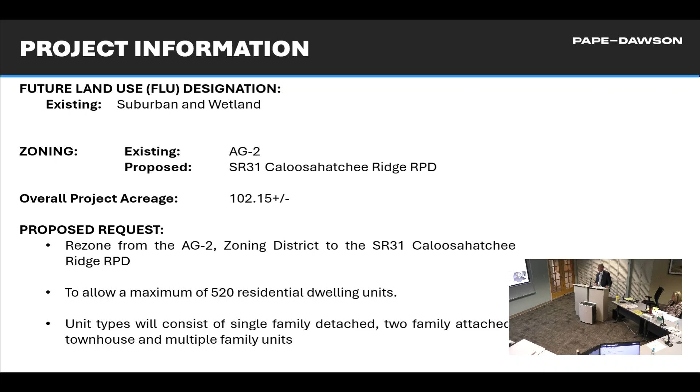This was our density calculation sheet where we came up with 520.94 units as our maximum.

After ERP staff did its calculation, which you probably saw in the staff report, they concluded that we could actually have requested up to 536 units to be consistent with Lee Plan Policy 1.1.5 and 1.5.1, which is a calculation that talks about the suburban land use category allowing a 6 unit per acre density.

We also have wetlands that we're transferring density from under that policy at 6 units per acre to parts of the property that will be developed. So we're taking 0 units for the 11.26, or 11.4, acres of impact to wetlands on the site.

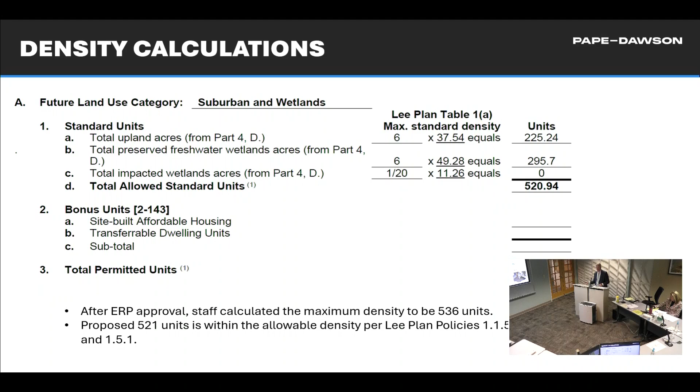So the site, as we said, we included the ERP in the 48-hour letter, and I'll go over a couple of those changes at the end, just to make it flow a little better.

This is your existing future land use map. Green is what's considered wetlands under your GIS system. The suburban is the gold crosshatch, and we did a prior land use administrative map amendment that staff acknowledged.

They had this portion of the site here, adjacent to FP&L property, designated as industrial, and staff determined that was just a clear mapping error, so it became suburban since it was not a wetland.

All right, so on the map, though, it's all shown as suburban. It's not shown as wetlands, I don't think, is it? The green is what's considered wetlands under your future land use map.

We're in for a map revision that I believe was completed today by staff, and that map is going to look more like this. I don't know if that's the exact one.

I had this from our dealings with... okay, Mr. Burr, this represents the revised map. It does, and I think your staff may have a corrected version that's the official one. Okay, yeah, I have that for the record.

It doesn't really affect the density calculation. It really just cleans things up.

As you can see, this finger of green that was going out to the river, this is all a big ridge. I should explain that the river was dredged in the past, and there's a spoil pile that was established all along this area. So this area is actually higher along the river than other portions of the property because of those spoil banks that were created.

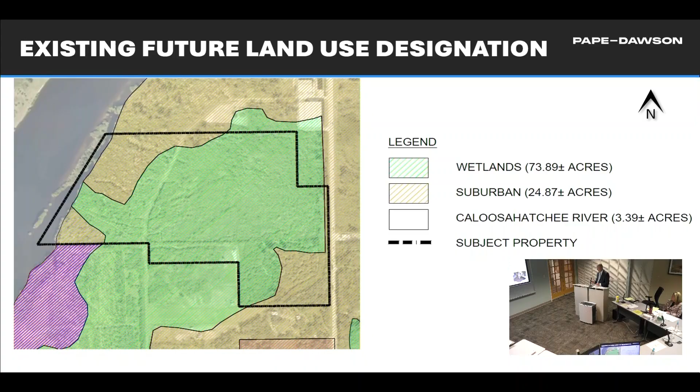This is our proposed master concept plan. We have a large area that we're not calling preserve on this plan, we're calling it open space wetland. That's all of this hatching area, and a little sliver.

One of the prominent features is this easement corridor that goes through the property and on down to Florida Power and Light. It's a 50-foot wide gas line easement that serves Florida Power and Light.

So they bring in, at the marina, a barge with fuel, and then it gets pumped under the property in a pipeline. We're allowed to cross the pipeline, but not allowed to build on it.

So along State Road 31 here, we have a primary access point shown at this location, which lines up with what used to be the little lounge across the street.

There's been some discussion, not by me but with others, with FDOT about that being a full intersection when they redo State Road 31, because Neal Communities has access in the same location.

We're showing a secondary access point, a right in, right out, in this lower portion. We believe this will probably become either a townhome project or apartments in this location. It's designated an R2 tract, and that's where we're proposing a 50-foot maximum height.

This primary road will extend all the way west across the Florida Power and Light easement area to a larger development tract with amenities that we're calling the R1 tract. That's where we've proposed the deviation to allow up to 75 feet in height.

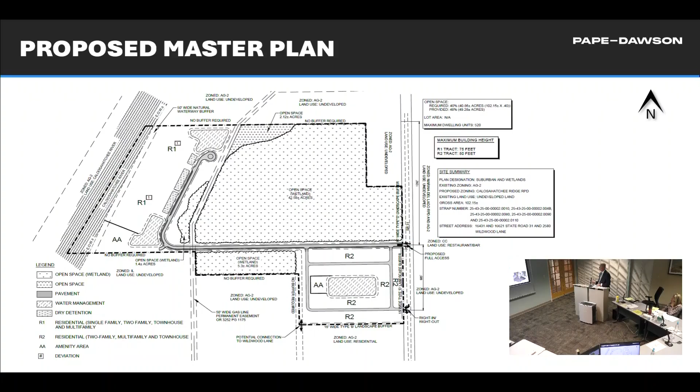Color versions are just a little easier to look at if you want to refer back to anything. We'll come back to this exhibit—you can see the two development tracts identified as R1 and R2, each with its own amenity areas, labeled AA, and of course the internal water body. A sliver of about 3 acres of the project actually extends into the Caloosahatchee River, but obviously no density was taken for that ownership.

Does this site plan take into account the improvements to 31? Or will the site be impacted by those improvements? The site may be impacted—we just don't know. There's been no notice of taking provided to our property owner. There's no drawings available yet?

I'll let Mr. Banks address that, but the exhibits we've seen have gone back and forth. For instance, they had a full interchange planned down at State Road 80, not at grade, and I've heard that's no longer on the table. They're going to make at-grade improvements now, so all of the right-of-way needs have changed.

We saw an exhibit—so it's going to be an at-grade improvement now? That's what we hear. I'll let Jim tell you a little more about that, or Scott. I'm just wondering about the road along the cross section, State Road 31. I don't know for sure. Like I said, they haven't provided an order of taking. They've apparently made contact—an appraiser has made contact with the county and our property owner—but I don't think there's a definitive area of taking yet.

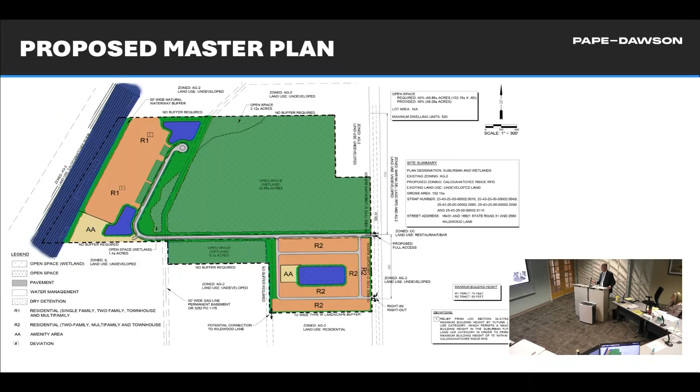Proposed uses, pretty standard here. As I mentioned, we're asking for accessory uses, the dwelling units I mentioned: single family, two family, duplex, townhouse. Excavation areas, entrance gates, potential fences, walls, recreation facilities, private, and fences, of course, and rental leasing offices in the event that we have an apartment complex.

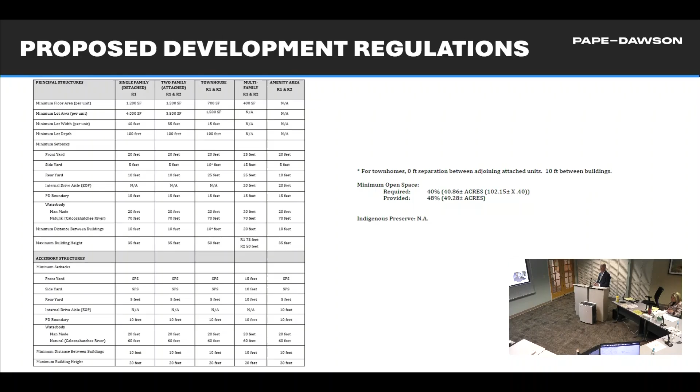Proposed development standards, hard to read. Probably the highlights are here. For the multifamily, we requested on the R1 tract, closer to the river, a 75-foot height. The R2 tract, a 50-foot height. And that's taken care of with the deviation that staff is supporting, and I'll go through that momentarily.

It shows you that it applies on the R1 tract, and we specified the one change I made that was in the 48-hour letter too—probably typographical, but it came out as tract K2 instead of R2 and R1, so clarifying those. Under the Lee plan, 45 feet is the standard height, and we're allowed to seek heights up to 75 feet if we can demonstrate that we've met the deviation criteria.

In this case, we've prepared a cross-section for staff. We had no access to the single family here, but we did have access to the condominium buildings down here at Bay Point. It's about 1,300 feet to where our closest building could be. We prepared a cross-section that showed that 1,300 feet plus our setback, the natural water body buffer, and some landscaping. We don't really reflect it, but all of that shoreline has a mangrove fringe on it.

And then you can see here, in front of our property, there's this linear mangrove island that provides some additional protection for views. But I think the shortest view, even from here to here, is about 1,000 feet. So we think that given the road improvements on State Road 31, where at least the last we heard, they're going to be fixed, it will be a fixed bridge.

It's probably going to be up to 75 feet in height for the bridge structure. And then they're going to elevate State Road 31 as a hurricane evacuation route. So we believe that once you make those State Road 31 improvements, the increased height—the 5 feet on the R2 tract—is probably indistinguishable from whether it's 45 feet or 50 feet.

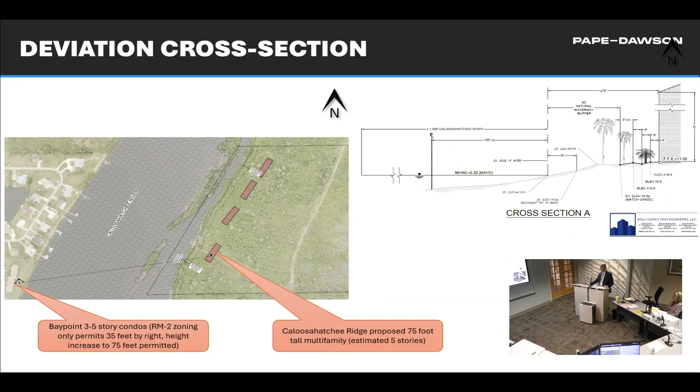We have the boat barn to the north that you're probably familiar with. Some of the FP&L structures to the southwest are also tall, and we had our surveyor stop by and measure the height of the Lee Civic Center—that building's about 77 feet tall. So in the vicinity, we're not out of character with that. We think it makes sense to allow these residences along the river to enjoy some river views.

Here's some imaging that we did showing potential building in the background. This is taken from the Bay Point condominiums to the south, where I showed the cross section.

Again, to show you what's going on in the surrounding area: here's Bay Point across the river, where we took those images. I think you're pretty familiar with everything going on. There's a series of commercial at the intersection. Neal Communities had 31 Oaks and the Oaks at Twin Lakes, the Caloosahatchee Palms, and just going on State Road 31, there's a significant amount of development occurring on that corridor. So this isn't an isolated rural area, and certainly won't be once a lot of the other state road improvements are completed.

Again, this is a little closer image to see all that's going on in the corridor, north and south of the river. Clearly an urbanizing area. There's water and sewer available to the site, so that clearly is going to support more of an urban designation rather than the ag zoning that it is today.

We did a pretty extensive Lee plan analysis; that's part of the narrative background. I've got a lot of these policies—I'm not going to mention all of them, but the principal one we already talked about was establishing the density for the property under the two policies.

One is your wetland policy that allows us to transfer density off of wetlands that are not being impacted, and the other is that the suburban upland areas could be up to 6 units per acre. So those two calculations together come up with 536 units. We're asking for 520 units, so we're within the Lee plan policy for density.

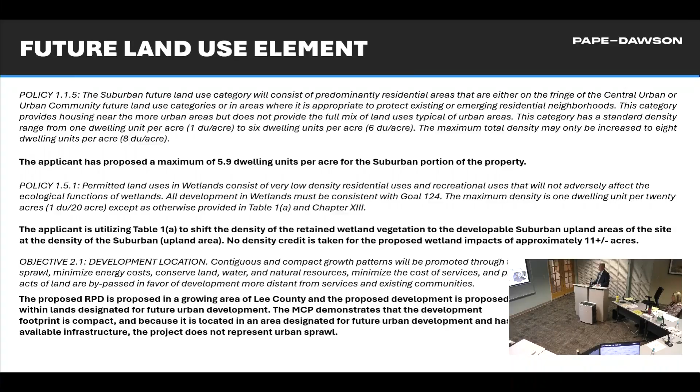As I mentioned, we have water and sewer to the site for residential development. A portion of the site is in the coastal high hazard area. But it's really odd because all the areas along the river, the spoil piles, are not in the coastal high hazard area.

The coastal high hazard area is largely in the middle where we have the wetlands that are going to be preserved. It's kind of a unique designation, but all of these get elevated out of the floodplain, so there's really not going to be an issue for residences. And with State Road 31 improvements planned, you have a road corridor that can carry people safely in the event of a hurricane evacuation.

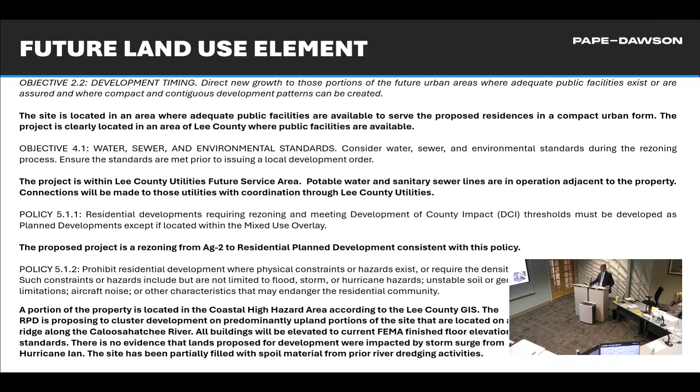The Caloosahatchee Shores Community Plan, which we're within, talks about maintaining the character and natural resources. As the slide showed with all that's going on in the corridor, this portion is not really a rural area, but given the high amount of open space we have on the site, conditioned by staff, and our adjacency to the river, we don't think there's an issue in terms of compliance with the plan, and staff concurs with that.

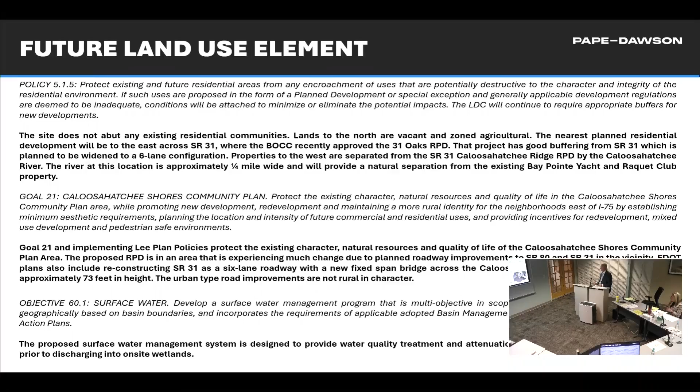For natural systems and the water management system, you'll hear both Marco Espinar and Mike Delate talk about how we've incorporated these natural features as part of our drainage system. This has been through an extensive review by the Water Management District for both the impacts to wetlands and the water management system, which you'll hear about later.

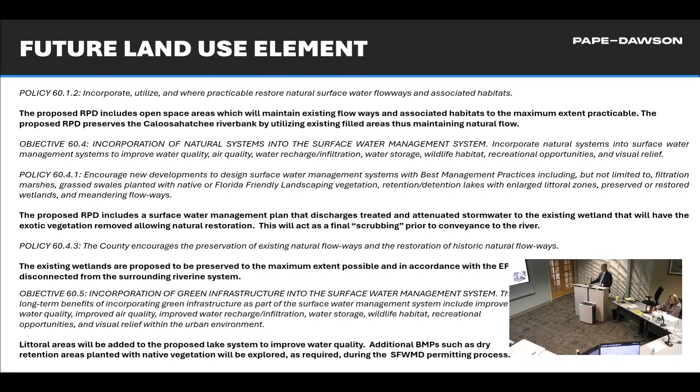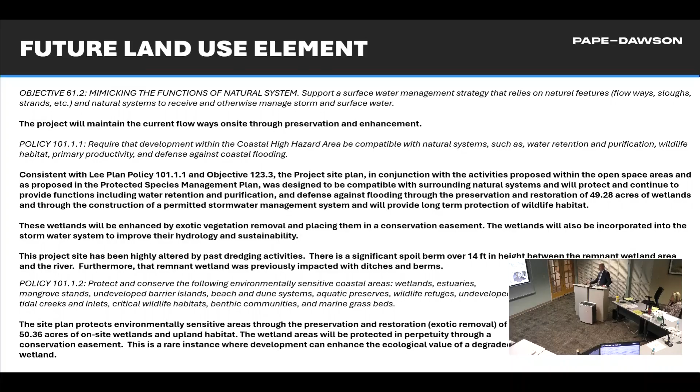For open space areas, as I mentioned, we exceed the minimum required, and staff has conditioned that we'll have at least 49.28 acres of the 102-acre site as open space. So we've exceeded your open space standard, and we'll have to reflect that on any development order plans that come forward.

Highlight here would be development sort of limited to a density of 1 unit per 20 acres in wetlands. As I said, we impact a little over 11 acres of wetlands, and we're not claiming any density consideration for that. And again, we're cleaning up and preserving the other, what are very poor quality wetlands today.

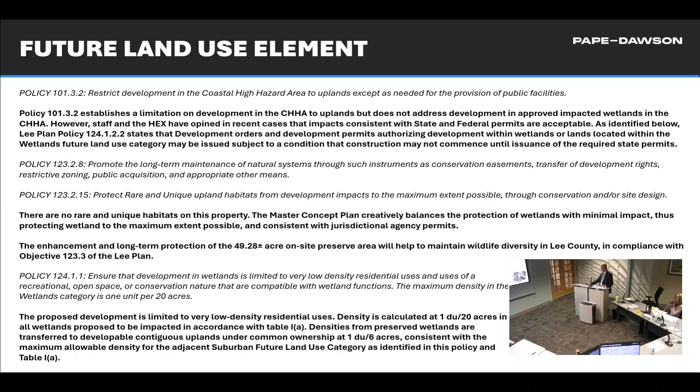Stormwater management, I know it's a big issue for everybody. Mike Delate has a few slides that he'll go through with you to talk about how we're in compliance with policy 126.1 with our surface water design.

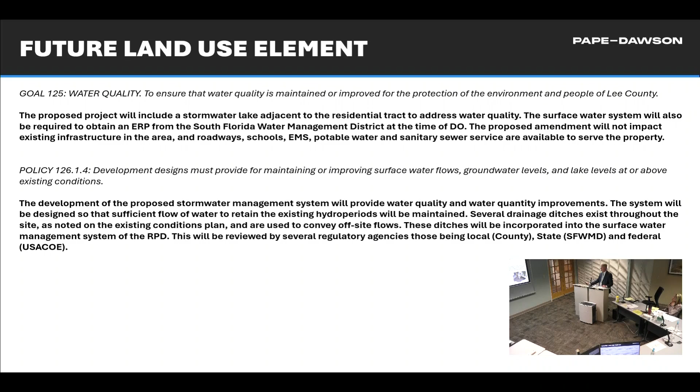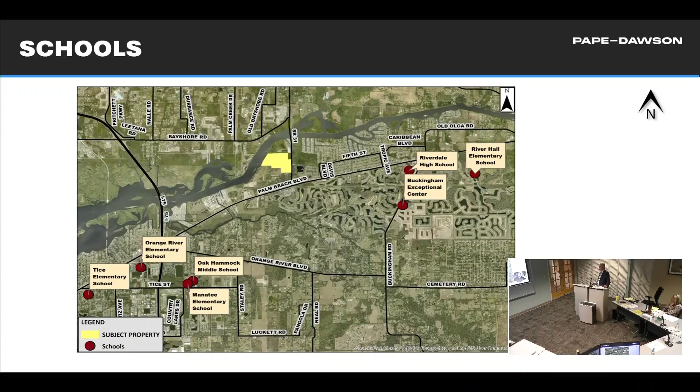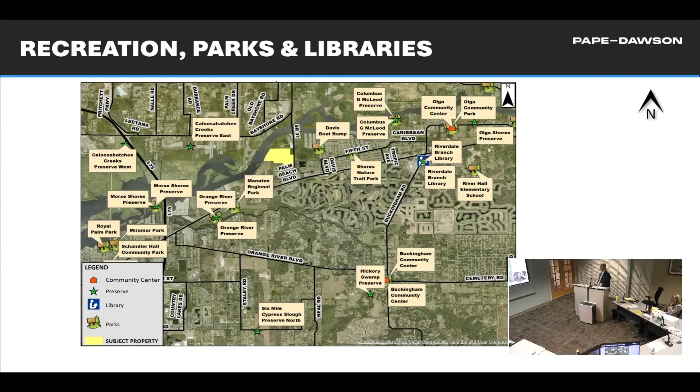Schools in the vicinity include Buckingham, Riverdale, River Hall, Orange River, Oak Hammock, and several other schools. There are a lot of parks and recreational opportunities in the area as well, including Manatee Park, which is very busy today I hear because of the cold weather, plus other libraries and schools in the vicinity of the project.

Employment and shopping, I don't have to tell you, I think you're familiar with that corridor, but there's a lot going on in that area, growing with Babcock Ranch to the north and more things coming. The Greenwell project, when it starts developing, has several hundred thousand square feet of commercial that will be coming online as well, providing more employment and shopping.

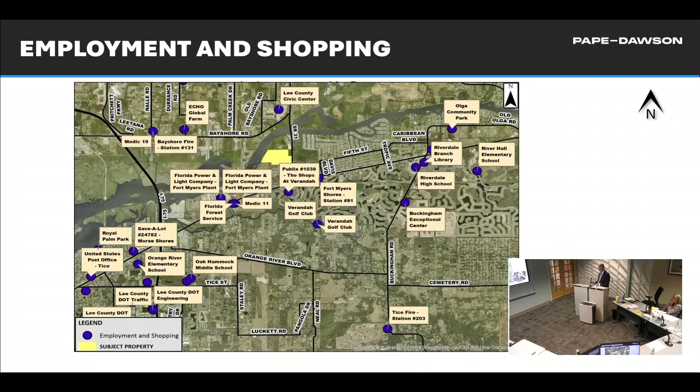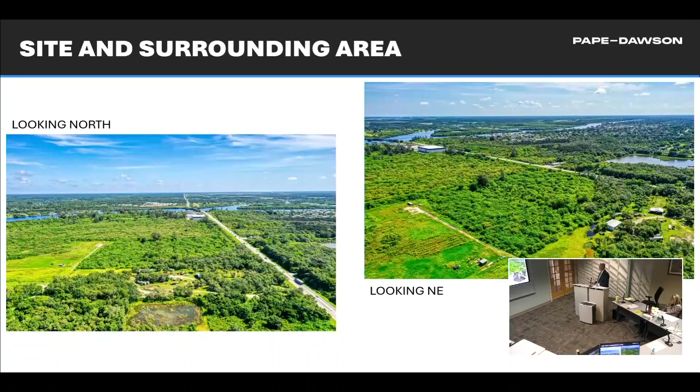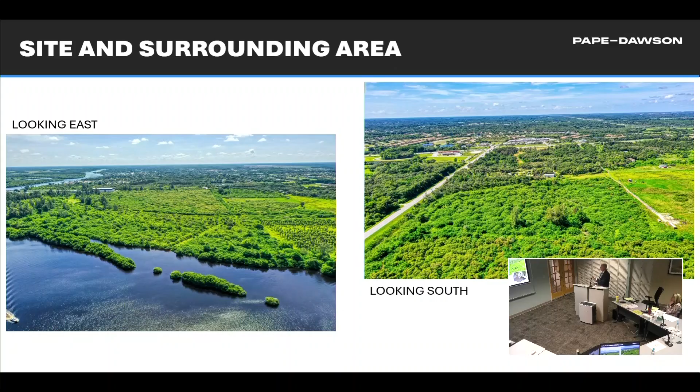Again, State Road 31 looking back to the State Road 80 intersection here, and a lot of this is scheduled to be commercial development in the near future.

Again, looking north, highlighting the fact that we've got the islands here. Boat Barn to our north is our closest neighbor.

And that's kind of in a nutshell the overview of where we are, and then we thought we'd go through and have Marco Espinar talk to you a little bit more about the environmental stuff, followed by Mike Delate and then Jim Banks. And if you have any other questions, just feel free.

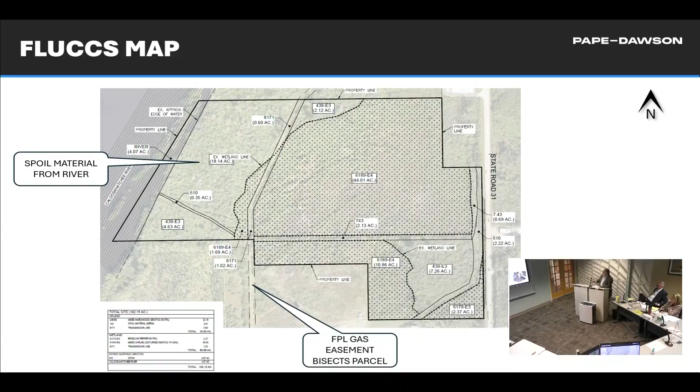This is all the wetlands here, and this is the preserve right here. We limited our wetland impacts to this area. Both are poor quality wetlands, but between the two, we thought there would be more ecological significance by preserving that whole area and limiting our impacts to this. This is a summary of what I just stated.

I don't know of any more specific questions. No, thank you for the explanation. One question, if I may. During the review of the wetlands, we didn't have the ERP during our review, so we didn't have the state permit.

We were asking questions about saltwater wetland versus freshwater wetland. In your testimony, you talked about removing the exotics and letting it heal to see if it's brackish or fresh. How is that going to affect your density?

You stated saltwater. We're not saying it's saltwater, we're saying it may be slightly brackish, which is just at the edge between freshwater and saltwater. So it's not saltwater, it's brackish — it may just have slightly higher salinity than a normal freshwater marsh. But personally, I think it will turn more into a freshwater marsh because of the isolated nature of the FPL easement, which has existed for over 30 years and has cut off that area, creating a barrier.

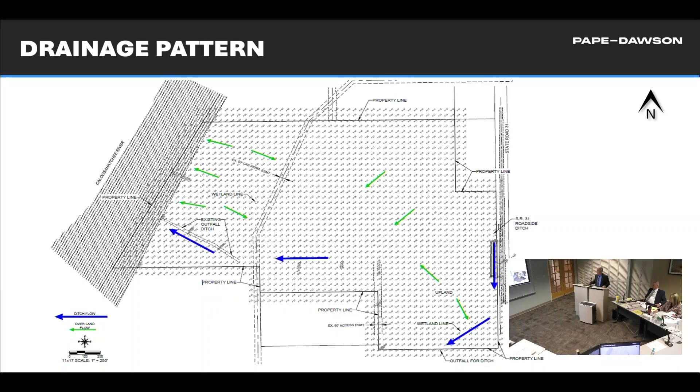Right now, if FDOT doesn't proceed with that work or comes up with a separate design, we have an ERP permit to perfect that outfall to the west. I'll go over that now.

So, alluded to a little bit of that. We won't be impacting that ditch that exists on the north side of the entrance along State Road 31. We do have proposed, though, to keep that ditch intact, clean it up, and run it to the south along the east side of this proposed basin area.

FDOT may or may not impact that, but our plan right now is to take that, and if you recall, it kind of shunts across right here with a ditch. We'll be carrying that along the State Road 31 right-of-way area, but inside the property, and then picking that up with a ditch and pipe system to run it west.

And at the end of this property right here, that's where the ditch re-picks up again, so we just connect back in to where the existing ditch is. It's just a short portion here that gets repiped and re-swaled.

And that was approved by the Water Management District. We provided supporting calculations and modeling to show sufficient capacity for that rerouting.

We'll have treated stormwater in this pond here and some dry retention. That gets delivered or discharged over to the large wetland area, with overland sheet flow and water spreading out in this area. There's an outfall pipe right here that goes under the proposed connecting road, and from there it's an outfall ditch and pipe system that goes out to the river.

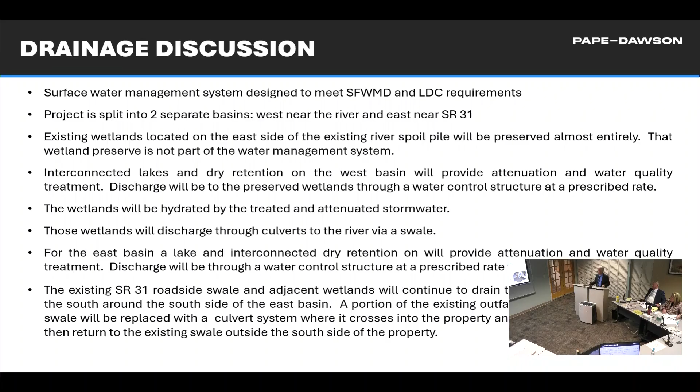This is just a summary that's in your packet of what I just described, and you could go over that at your leisure. I did want to bring up the FDOT piece in a little more detail, which is also in your packet. I described it because you asked questions, but you could review it later.

That gives more detail, but in essence we're working with FDOT to provide a common outfall, even though we're permitted to go through here, which would be beneficial to all parties. That's not really going to change with the recent development of them changing the configuration of the intersection with State Route 80. I don't think it changes substantively, because they still have to drain to this general area and discharge, and they've done quite a bit of design work on that already. I can't imagine them backing out of that.

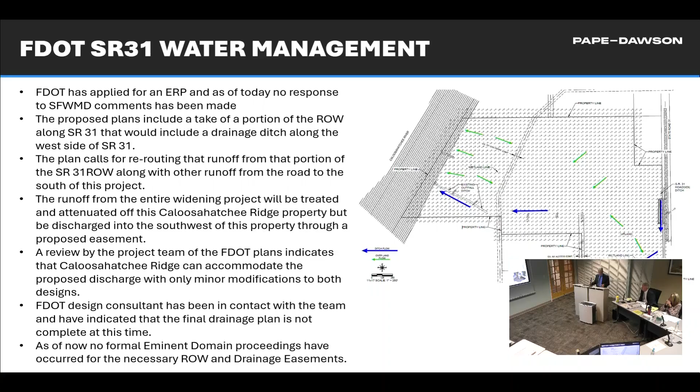I did want to point out one thing, going back. I'm not sure where the property owner is from here, but I want to make sure he understands there would be no discharge to the south through either the water management system or the outfall pipe. The only water conveyed is what's already going through there, whatever's captured along 31, and then that existing point here, which will tie back into the existing swale and improve and clean it up. But there would not be any conveyance to the south.

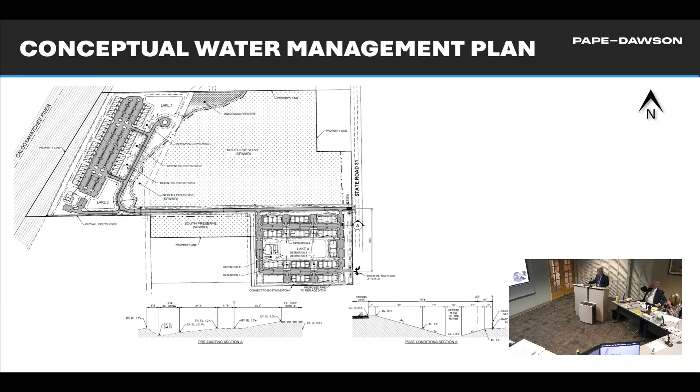So it's going to come down to that existing swale, and then you're going to direct it up to the wetland, right? No, let me go find an aerial here, it might be more helpful.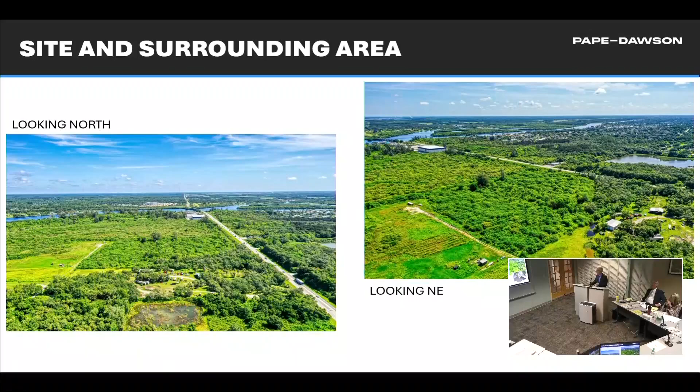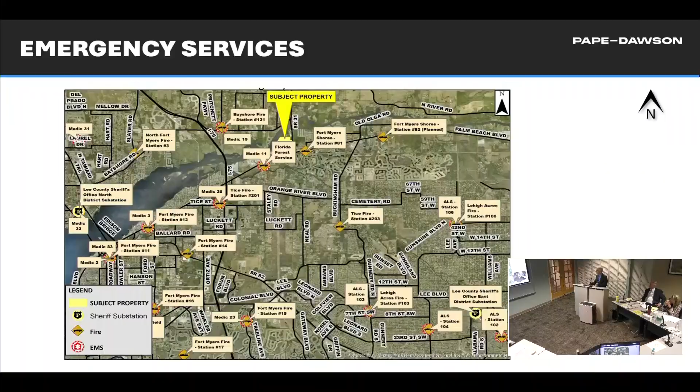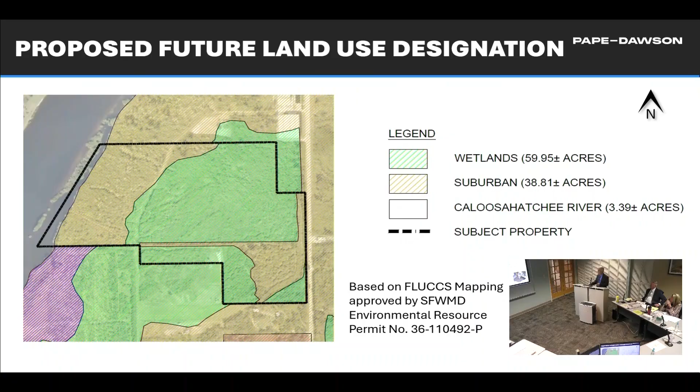I have an aerial. Trying to find a good one that could show that. It's so thick with vegetation in this area that nothing really stands out, but let me try to find it on a clean one here. Do you have an aerial in there, Wayne? I forget, I can pull up the GIS. Oh yeah, that'd be great if you could do that. Want me to do that? Yeah, I thought we had an aerial that showed that.

Here, there you go, zoom in. Perfect, so you can see that the remnant ditch comes along here, along 31. I don't know what FDOT plans to do with that. The plans I've seen had FDOT filling a good portion of that ditch and then piping it differently, but I don't think they were finalized with that. Anyways, the ditch comes around here, and you can see it angle across here. So what we'll do is straighten it out along here and then bring it back to this point and tie it in.

So it'll discharge to the south? Yes, it goes to the south, correct.

Where's that runoff coming from mainly, the road? Right now there's probably a little bit of runoff from the road. It's so low in there that any rainfall collecting off in the right of way kind of goes through there. That extends up to about the marina, and then it kind of blocks up there - there's a ditch block up there. So it's not a huge drainage area. You can kind of see the wet along here.

And then down here, you can kind of see the old east-west mosquito control ditch and berm that runs all the way along here, and that's where primarily the wetland impacts occur. We try to build on top of that berm that's there.

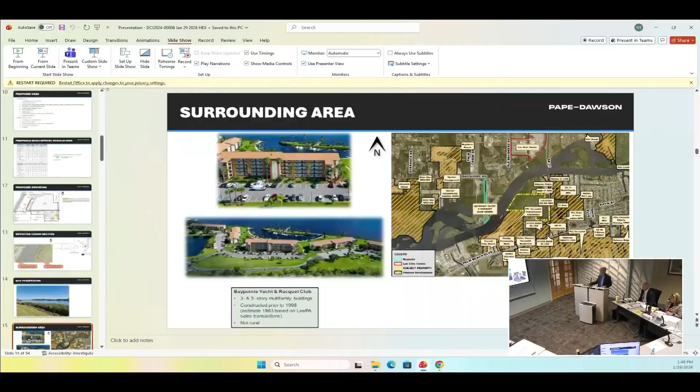Good morning, Madam Hearing Examiner. For the record, my name is Jim Banks. I'm a professional engineer in the state of Florida and president of JMB Transportation Engineering. I've been qualified by your office on numerous past occasions as an expert in the fields of traffic and transportation engineering, and if it's acceptable to you, I will continue on.

Yes, please proceed. My firm was responsible for preparing the traffic study for this project, and I'll get into the questions you had about State Road 31 in just a few minutes.

The traffic study, which you have on file, was prepared pursuant to the criteria set forth by Lee County government. Your staff reviewed the study and agreed with its findings. The study on file was actually based upon the proposed development of 544 residential units, and we're now requesting approval for 520, so that study slightly overstates the volume of traffic generated out of this site, but not significantly different.

The ITE Trip Generation Manual came out with their 12th edition recently, so we recalculated the number of trips that would be generated from this site, based upon the 520 dwelling units now being proposed, and we determined that during the PM peak hour it would generate 262 two-way trips. That's both entering and exiting, folks entering and exiting this site. The total would be 262 trips in the PM peak hour.

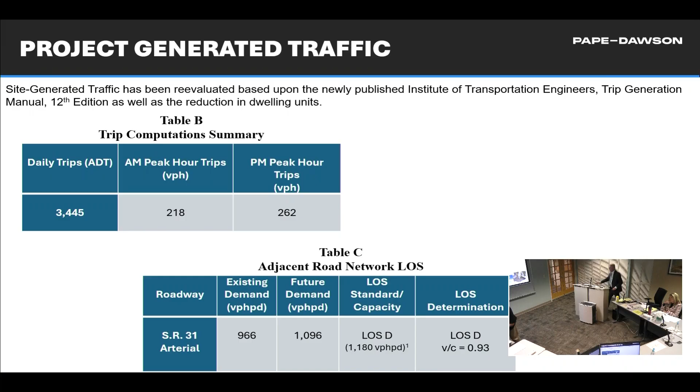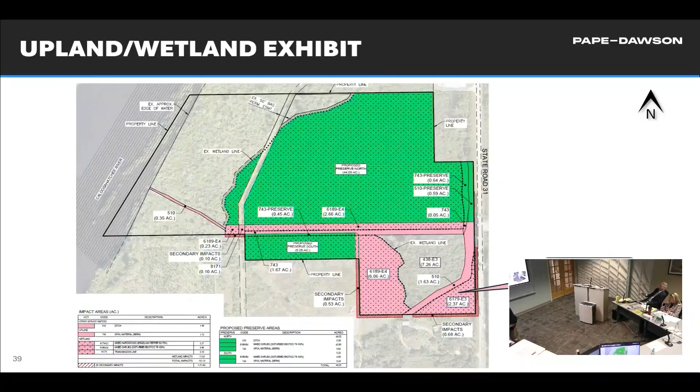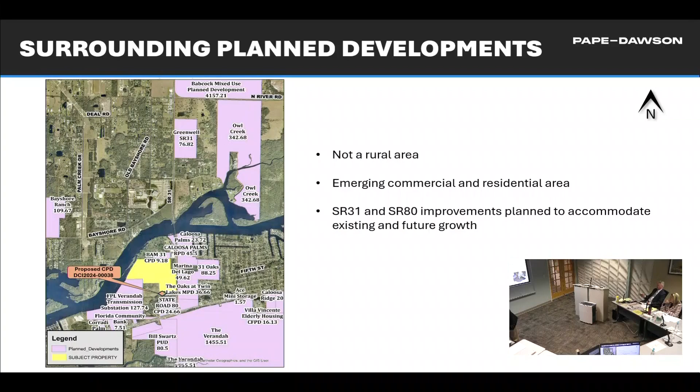Yes. And there was a question, and then here's a copy of the most recent, it's just 2 pages from their PD&E study, which specifically states - I just printed this out 2 days ago - which I'm going to submit to the hearing examiner. It says that the proposed improvements consist of widening the existing 2-lane undivided roadway to a 6-lane divided roadway from State Road 80 to State Road 78.

Replacing the Wilson-Piggott Bridge over the Caloosahatchee River with a high-span fixed bridge. It's going to have a 55-foot clearance from the bottom of the bridge to the surface waters. It's supposed to be a 55-foot clearance separation - in case you needed to get your yacht underneath the bridge, you know that now.

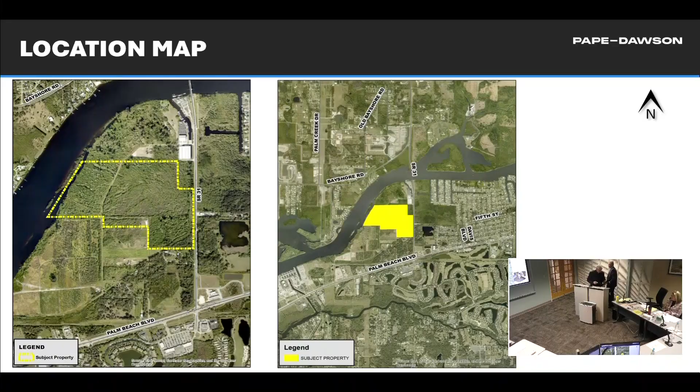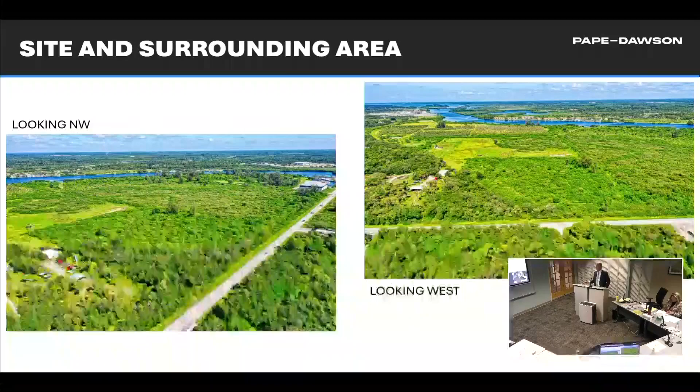So that really concludes our principal presentation. I had a conclusionary slide all the way at the end here, wrapping up with just another version of our master plan in case you had any questions regarding the master plan, and then highlighting our consistency with the Lee Plan, consistency with the land development code, subject to the one deviation that we've requested. Open spaces will exceed those required by the land development code.

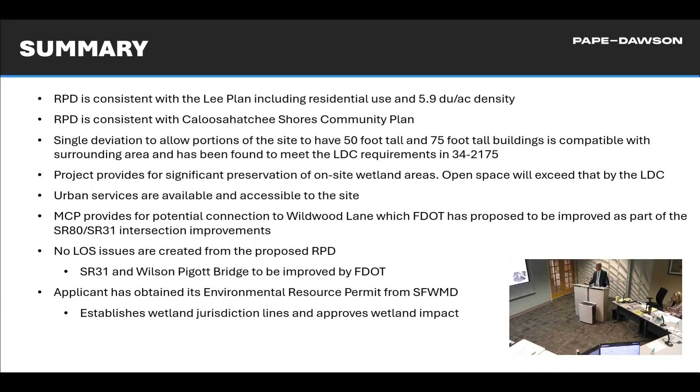You heard Mr. Banks testify there's no level of service issues. We've received our environmental resource permit. We don't have any residential immediate neighbors, and we agree with staff recommended conditions except for what I put in the 48-hour letter, which was to modify one of the conditions, which related to addressing the stormwater at the time of development order.

Well, and section A1, that should be 520, not 521, correct? Oh, I see what you're saying. Yes, yes, yep, absolutely.

So in the 48-hour letter, I struck the reference to the maximum building height, just because I thought it was redundant since there's already a deviation addressing condition 2. Right. And then under the stormwater management, condition number 6, you'll see we added a phrase at the end, as was reviewed and approved in the environmental resource permit.

And we said that not to be redundant, but we didn't want staff or somebody else to come back and make a request that we model something that we hadn't anticipated as part of our overall permit that we have to be consistent with anyway.

Staff, I think you'll hear that they're okay if you decide to add it, and okay if you don't. We'd prefer to add it just for clarity. The concern is that, as Mike Della told you, he had extensive communications and modeling and analysis with the Water Management District, and we don't want somebody saying we'll do the modeling again, and I don't agree with the district, and we get on a merry-go-round. So that's what we're trying to avoid.

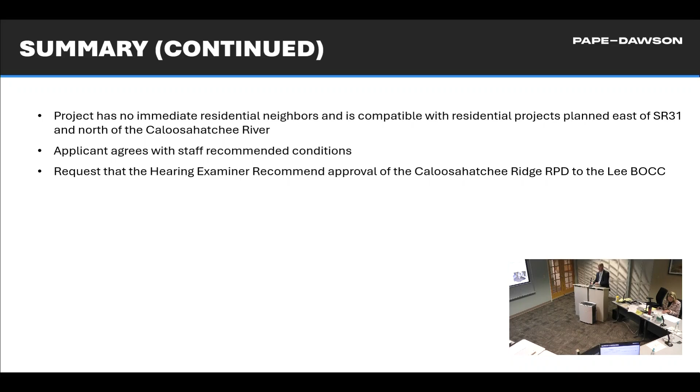We are ready for staff's presentation. Does anyone need a break, or can we keep going? Let's keep going. How are you? Keep going. When she tells me she needs a break, though, we break. Yes, she's in charge.

Okay. Everything good? Yeah, I'm all like, never mind.

For the record, my name is Beth Workman. I am a principal planner in the zoning section. I have been accepted as an expert in the Lee Plan and the Land Development Code, and I wish to be accepted as well today. Please proceed.

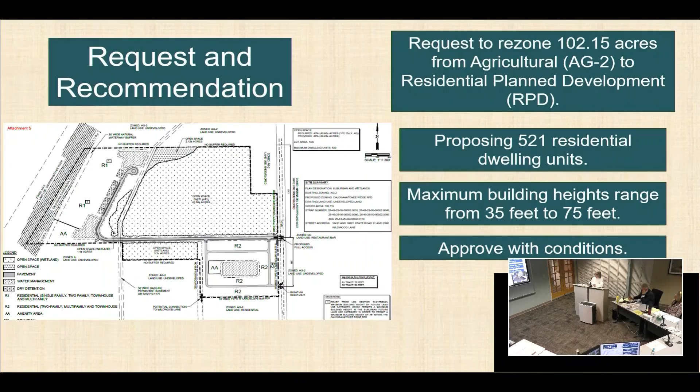Thank you. So the case before you today is DCI 2024-00006, Caloosahatchee Ridge RPD. It's approximately 102.15 acres. The request is to rezone from agricultural to residential planned development. The original application was for 521 residential dwelling units. The maximum building heights range from 35 feet to 75 feet, and staff is recommending approval with conditions.

So this is the future land use map currently, and you can see the wetland lines and the suburban lines. That mustard color is suburban, and that determines how much density the applicant can get from the rezoning to residential planned development. The applicant did apply for a map boundary determination, which was just signed this morning, so I have that signed document for the applicant, as well as copies for the hearing examiner.

So this is the comprehensive plan map revision? Yep, this is the map revision. So that's staff 3? This is staff exhibit 3.

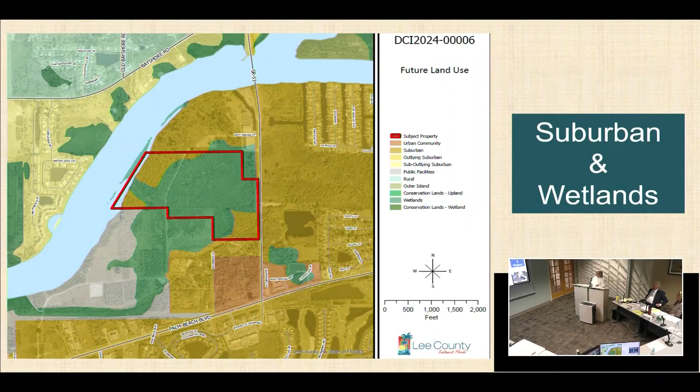All right, so what changed? It looks like they get... so if I take this and go back, you can see that sliver right there. And there's some changes down in here. So you got a bigger piece of yellow down in this vicinity, and then a larger piece of suburban contiguous along the Caloosahatchee. So if I go back, this is what it looks like today. Oh, I see. And then you got this down here and that right there. And now it's going to this. And now it's going to that, yes ma'am.

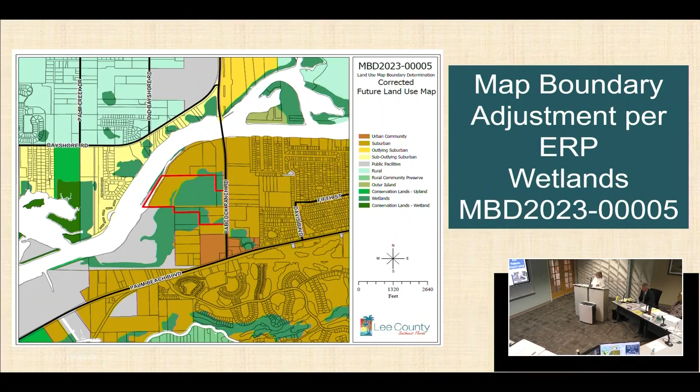So this is the importance of having a jurisdictional wetland determination at time of zoning review, and we just happen to have an environmental resource permit that was issued and was brought in post-sufficiency. And so that helps us determine accurately what's going on with the density because of the way the Lee Plan lays out suburban density versus wetland density for impacts to wetlands versus preservation.

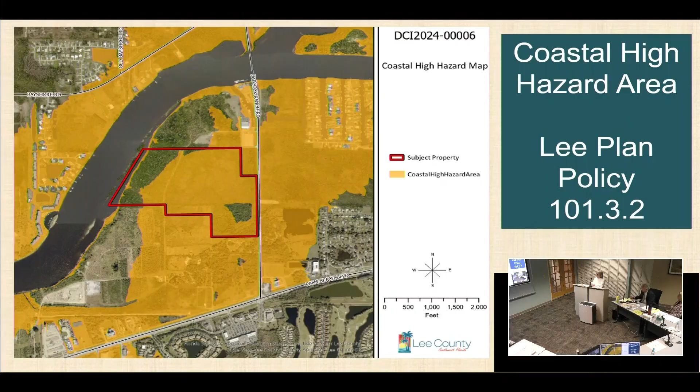The applicant is required to do a community plan meeting with the community. They advertised and held a community plan meeting on March 14th, 2024 with the Caloosahatchee Shores community.

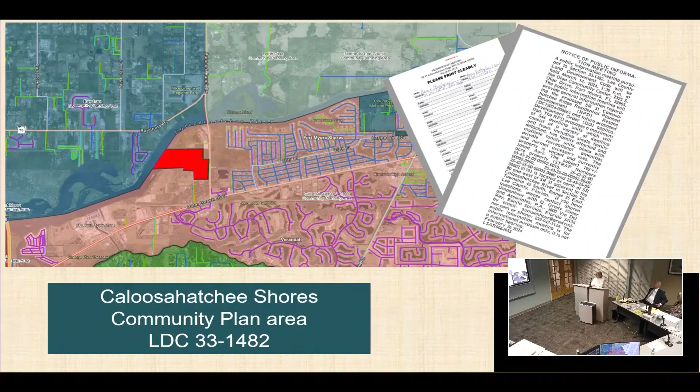So in doing the rezoning, there are set criteria that the applicant has to provide to staff during the review of a rezoning, and then the hearing examiner needs to hear during this venue to make sure that all of these items are met. So for just a straight rezoning: the Lee Plan, the Land Development Code, existing and future land use, compatibility, transportation, environmental, and then is the proposed use in the rezoning appropriate in this area, looking at the surrounding land uses, and then if there are any deviations, do they protect the public health and safety?

So looking at density, going back to that map boundary determination that was just signed today, what that does with the jurisdictional wetland determination and the environmental resource permit is it tells us what we have for total state wetlands, because the Lee Plan requires county staff to protect state wetlands. County staff does not judge what's a state wetland or not - that's a function in the jurisdictional wetland determination.

So 59.95 acres of total state wetlands. Impacted is 12.74 acres - this is straight from the ERP. And the preserved is 47.21. So taking all of that and plugging it into the calculation in the Lee Plan for suburban, preserved wetlands gets calculated for freshwater wetlands at a 6 unit per acre. So it takes on the suburban. And then the impacted wetlands is 1 dwelling unit per 20 acres of wetland impacts, in this case 0.

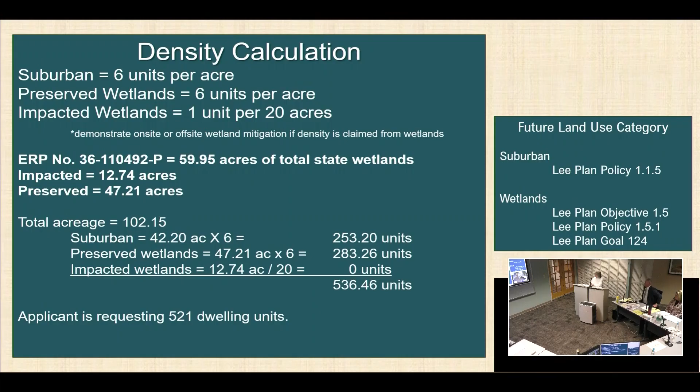And so is it compatible with the surrounding land uses utilizing the Lee Plan Goal 5 and Lee Plan policies 5.1.2, 0.5, and 0.6? What these do is they're saying if you put in residential here, what are the adjacent uses? How are you screening it? Is the transportation enough in this area and the access enough to not negatively affect the surrounding land uses?

So in looking at the surrounding land uses - and Mr. Arnold did a good job going through, he had it labeled better than I am - but it kind of goes through what is across the street and to the east and to the west and to the north and south. And what we have here, and I put the master concept plan on there, is we have 31 Oaks directly across the street.

And so they're lining up, and that little red spot is the old bar that was there, RJ's. So what has happened is 31 Oaks has purchased RJ's, and they're putting in an entryway. This is where their new entryway is going.

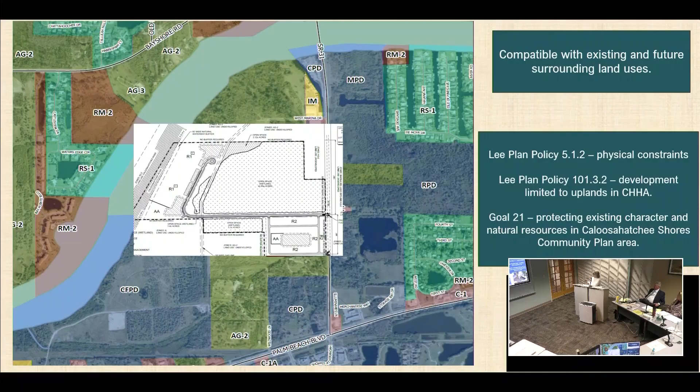What I have done is I've taken the site plan and overlaid it onto the coastal high hazard map. So you can see the mustard colored is where the coastal high hazard line is, and then the green or shadowed in gray is where that's outside of the coastal high hazard. This is important because you can see how the applicant has focused the development into the uplands, along the ridge.

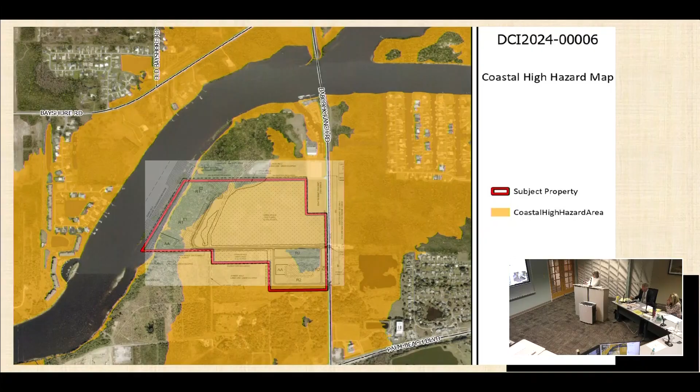You have some impacts happening down in here, but we have a South Florida Water Management District permit and a jurisdictional wetland determination within that that says we're mitigating for those impacts to make them uplands. So it is meeting that Lee Plan policy for the mitigation to make those uplands in the future when it's developed.

Looking at environmental, so wetland preservation, there's no indigenous on this site. When a development comes in and it's a large project and it's residential, they must provide 40% open space. Of that open space, half must be represented, so 20%, in indigenous. This site doesn't have indigenous. So what the applicant is doing is providing all their open space in these wetlands, and they're preserving them, and any mitigation for the impacts occurring on-site to the wetlands is happening in these open space areas.

So how does that work with our requirement? All the open space is in the wetlands, so the 40% is all within these wetland areas. They're restoring them for water quality and storage compensation for any floodplain issues. There's a conservation easement required per the district permit. Building habitat for wildlife with the restoration and any seed sources that occur once the exotics are removed. It's also providing a natural landscape buffer along the right-of-way.

But this is going to be completely cleared. If everything's exotic, it's going to look like a farm field, right? Correct. So at the time of development order, they're going to have to demonstrate that the type D buffer is meeting what's in our code.

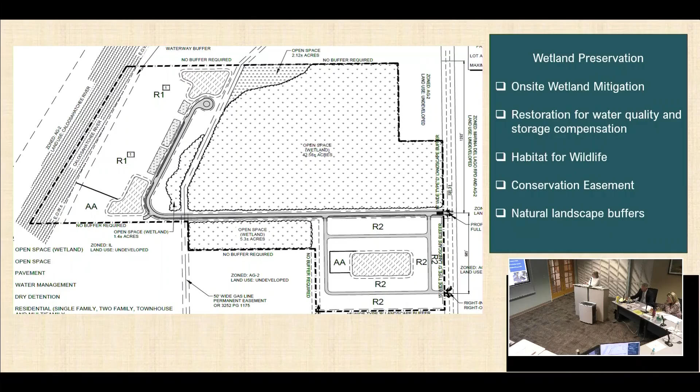If they choose to do their restoration plants on here, restoration plants typically go in at a 3-foot tall tree. They're going to have to recognize that they need 10-foot tall in here if they use restoration plants. Because the ERP that's in the file does have a plan for restoration. The Army Corps is saying they don't want on-site restoration, they want off-site mitigation, but the ERP does have a list of planting material that's going to go back into this preserve, and I have that right here. They're required to do that in exchange for the wetland impacts, for their on-site mitigation.

And so that was the importance about during the review for staff, we were asking the questions: is this salt? Is it fresh? What is it? How are you restoring this? Do you have a plan in? And we kept on getting told, well, we don't need an ERP to do this, we don't need that. Well, we got an ERP.

And that helps us decide, okay, yes, you are going to be fresh with the way the surface water management's going. The plant material that's being established in here is borderline fresh, with some brackish species that will tolerate a little bit of salt coming their way. And so this is the plan that the district has in that ERP.

And so this is what's going to be replanted in this at grade, because this is a bowl. That whole area kind of dips down, and so they're going to be building up their roadways. So really you're going to get the upland buffering for the right-of-way, and then you're going to have all this restoration occurring. Because right now when you drive down 31, the bowl is still there, and you have vegetation, as you could see from the drone video, or the drone photos they had in their presentation. So that's all exotic right now, with some cypress and some live oak, and there's some water oak in there.

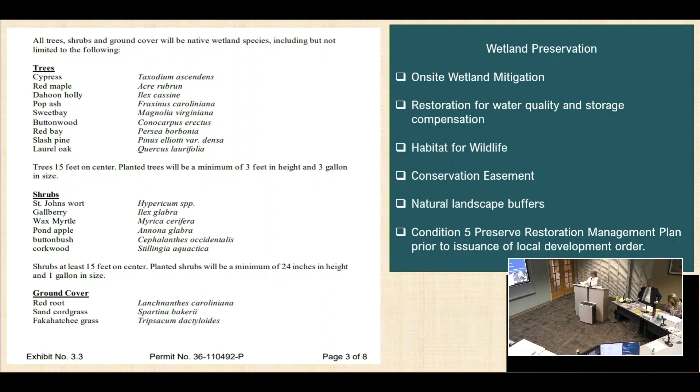But condition 5 of the zoning is to provide a restoration management plan during the development order to state what is going to be going into that wetland preserve. So we're going to need to see that at time of development order for that open space. And it's twofold, because it is the open space and it also is preservation to gain density on a suburban level. So we want to make sure that that is preserved.

So looking at the open space, as I mentioned, it's 40% open space. The applicant's providing 48%.

The landscape buffers, as we go around the master concept plan: there are no buffers provided or required to the north, no buffer provided at the northeast — these are all vacant AG2 properties. There's a 15-foot type D required along the east where the project abuts State Road 31, working all the way down to the southeast. Along this bottom portion, which is cut off by this — I thought I always have it right, but I don't — it's a type B buffer.

A type B buffer is similar to a type D. It's 15 feet, same amount of trees and shrubs. So this will be matching what goes in here, because there is a single family residential home to the south on an AG2 property, so they have to provide the type B buffer.

There's no buffer next to this vacant AG2 and no buffer against the industrial over in here. What's the difference between the D and the B? There's no difference, it's just what it abuts. So in the land development code, if you're residential with a multifamily function abutting a single family, it's a type B, and it's the same dimensions, same everything, differentiated between a right-of-way buffer.

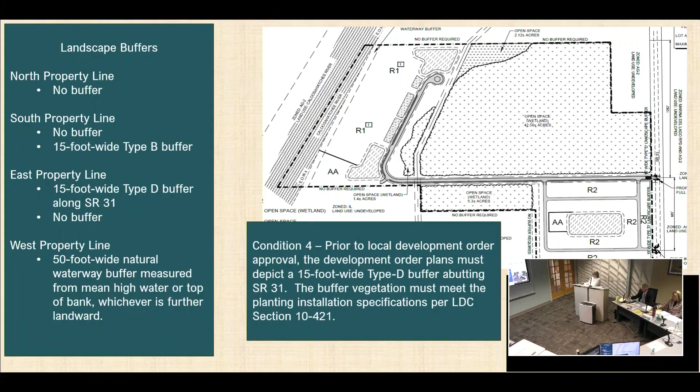So they're meeting the land development code on all the landscape buffers to the north, south, and east. The natural waterway buffer was reviewed to make sure that a 50-foot natural waterway buffer was measured from the mean high water or top of bank.

And they're required to plant that area? Yes, they're required to plant that, and there's a required number of trees and shrubs that go into that buffer, or you can save what you have. Now, as they mentioned, this is spoil, so there's going to be a need to put some vegetation in there meeting that code requirement.

And this all comes into play at DO time? Development order time, all these things, unless they ask for a deviation, come into play.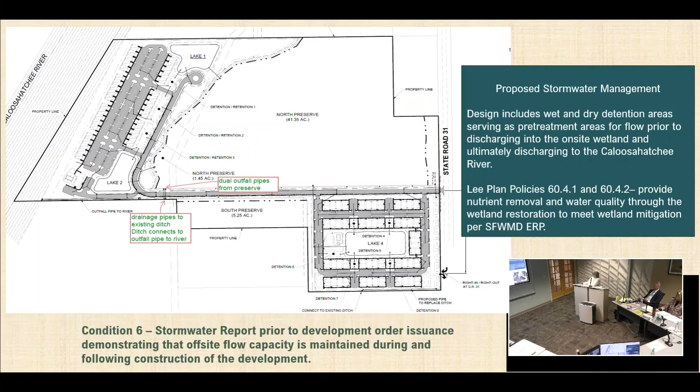And then the treatment to meet policy 60.4.1 and 60.4.2 for water quality and nutrient removal. Plenty of detention basins, lakes. The preserve is going to act as a filtration system. Once the exotics are out and it's restored, the native plants will tolerate and filter.

Looking at transportation, Mr. Banks went thoroughly over it. He kind of has his finger on the pulse on the State Road 31 widening, as well as what they will allow. It's important to note that we have two access points here.

And then we also have another access point which got cut off to Wildwood as an option for interconnect to that CPD at the south that currently has a DO that has a gas station approved on it, which may need to change depending on that intersection improvements.

Lee County staff recognized that at time of development order, there would need to be compliance with the FDOT improvements, and staff will review that to make sure that what staff receives during the development order review is matching what FDOT is proposing as well.

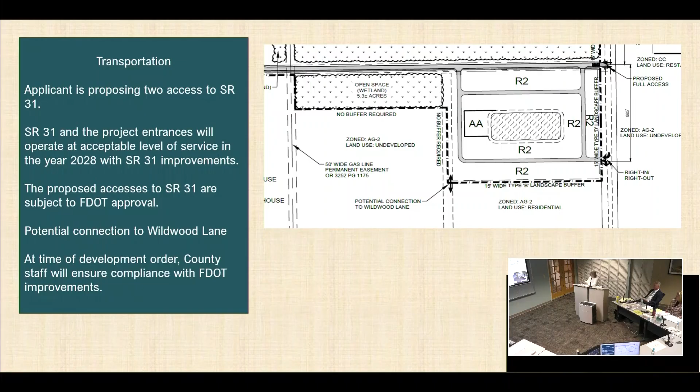So I did a blow up of that little interconnect there for Wildwood.

Public facilities are being met. It's important to note that in the public facilities letter for utilities, 544 multifamily residential units were assessed for that, so they're over. Public facilities met, police, fire, emergency. Mr. Arnold did a good job with the map showing where everything is for schools and access to parks.

And so looking at the 48, we agree that it is redundant, that can be removed. This will need to be changed. That was not in the 48-hour letter, but 520.

This is the one where we're deferring to the hearing examiner, as was reviewed and approved in the environmental resource permit. Staff rarely cites the South Florida Water Management District permits and conditions just because that's a state function all on its own. They're going to have to demonstrate that regardless during the DO review, whatever that permit is.

I'm not clear on what we gain with this clunky addition to the sentence. I feel as though this will be addressed at the development order stage. The sentiment is clearly stated in the first part, and I don't think it adds anything, especially since it's something that's going to come into play at the DO stage.

Yes ma'am, that's why we're deferring, one way or the other, staff was. Plus, there could be changes because of the take and everything. So I don't know how much in the weeds I want to get with this. I'll look at it, though.

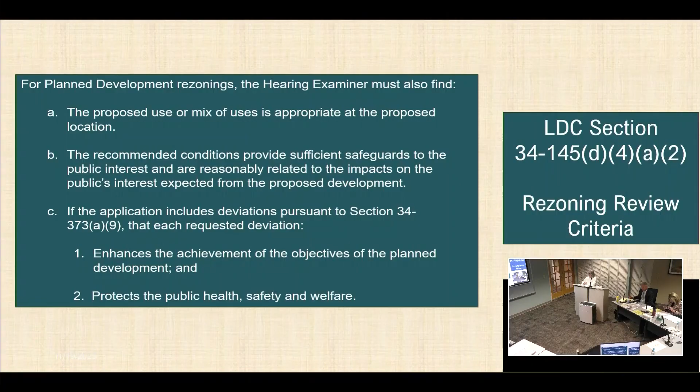Okay, so I have a question. My reading of the request and the conditions is that there could be high rises, there may not be high rises. The pod next to the Caloosahatchee allows for single family or townhouse or whatever development. So really, this is wide open. Only they're not going to put the high rise, obviously, on the portion that's next to the road.

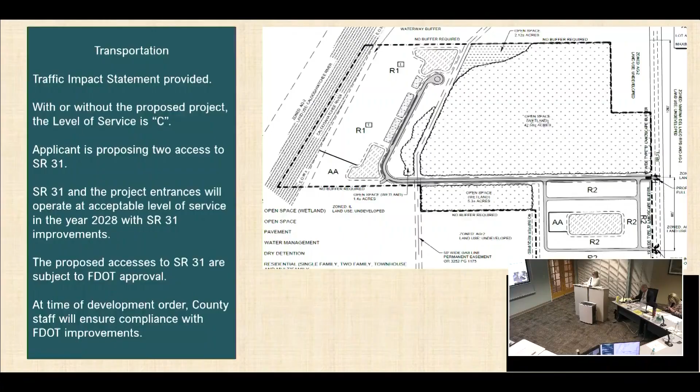That's not called out. Correct. Okay. Correct. So they really have a lot of flexibility here. This can go in a lot of directions. Yeah, so this building heights section kind of lays it out, what is being allowed in the different R1, R2 areas. So yeah, there's a lot of flexibility.

And from a staff perspective, with the unknowns with 31 and the changes that may need to take place with an MCP, that is sensible. It gives us room to work on some changes when the taking finally happens, we've been talking about this taking through the whole entire review process.

You know, my desire for the applicant would be to avoid the need to come back here after the take, that there'd be enough flexibility in what's been addressed in the conditions and deviations or no deviations, whatever, that any change can be addressed administratively with staff.

Yeah, right now, the way that staff was reviewing this was the right-of-way buffer, and through a taking, that is allowed to be through an administrative action. Okay, good. And that's it. Very good.

That completes the parties' presentations. I'm ready to accept input from the public if the public wishes to speak.

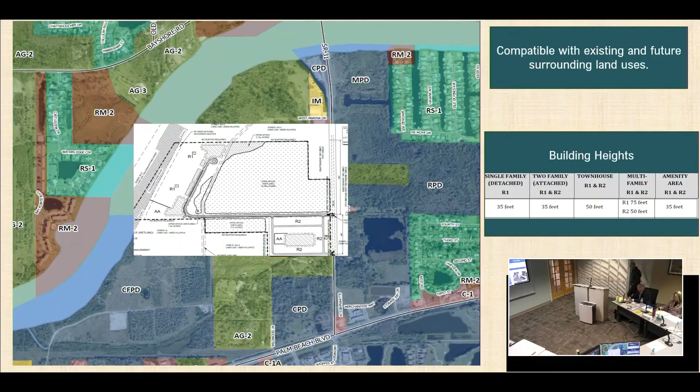I own, according to your map, the AG2 property to the north, the pie shaped one, on the river. I have a disposition against any development of properties or changes of zoning, because my view is that we have development run amok in this county and other counties. We need to preserve the land for other uses.

We do not have in this county a right to farm law. If we had a right to farm law, this meeting wouldn't be happening, because it prohibits developers from coming in and taking ag land and trying to turn it into developments.

I know you talked about the 75-foot height. I think it's a little bit high, but it depends what they're going to do. They may not build any high rises, or they may build high rises out there. I think we need to maybe look at some of this stuff after 31 is built. The world's been here before we got here, it's going to be here after we got here, and the earth is known to fix itself where people have made mistakes. I really believe we need to look at development more responsibly than what we're doing.

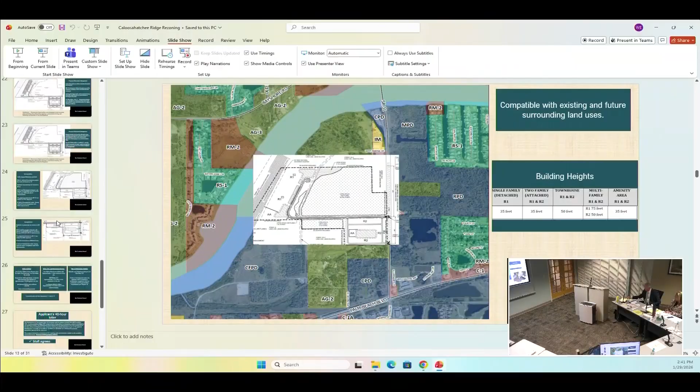I want to go back to condition 6. I heard what staff said, and what Madam Hearing Examiner said, but if I look at section 10-321, the surface water management section of chapter 10, when you're getting a development order, what's required is an ERP, and the county relies on the district for the ERP and meeting those criteria. The testimony you heard is they've been in the process for more than a year working on the ERP, and the Corps takes twice as long, and they're close to the end.

Mr. Dell testified that they had to do modeling and a lot of analysis and reanalysis. Since the county doesn't have any independent rules and relies on the district, telling you to go get all your state and federal permits, what modeling under what criteria are we going to do that's different from what we had to do for the district? And if it's different, what happens if someone decides they don't like what the district did? How do we avoid the catch-22, especially when 10-321 says we rely on the district? That's the concern. The code says we rely on the district. That's period, that's the end of it.

Well, then we don't need condition 6. I guess that's where I am. Condition 6 is to make sure maintenance during and following construction. What you just said is that during the DO, we rely on the ERP. Well, yeah, but what's been put in here is as was reviewed and approved.